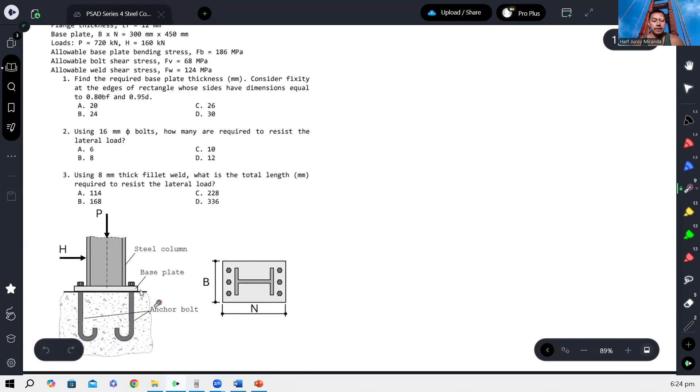You're given the properties of a steel column: the depth is 305, web thickness given, flange width given, and the flange thickness is also given. You have a base plate with given dimensions, and loads - a vertical load and a horizontal or lateral load. You're also given the allowable base plate bending stress, bolt shear stress, and allowable weld shear stress. Actually this item is under allowable stress design because of the given values.

But let's solve it anyway. Okay, so let's start with number 1: find the required base plate thickness, considering fixity - meaning fully restrained - at the edges of a rectangle whose sides have dimensions equal to 0.8 bf and 0.95 d. So what is the thickness of the base plate?

So what's given here, this is actually the conversion we use when we have a wide flange. That is, the converted rectangular or assumed rectangular equivalent section of this wide flange column. So what we do is...

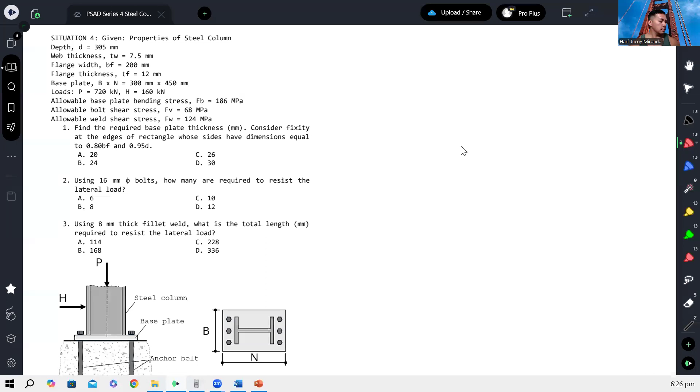Let's enlarge this. So that means let's assign values. This is 300, and then this is 450. So what it means by 0.8 BF and 0.95 d - if this is the BF...

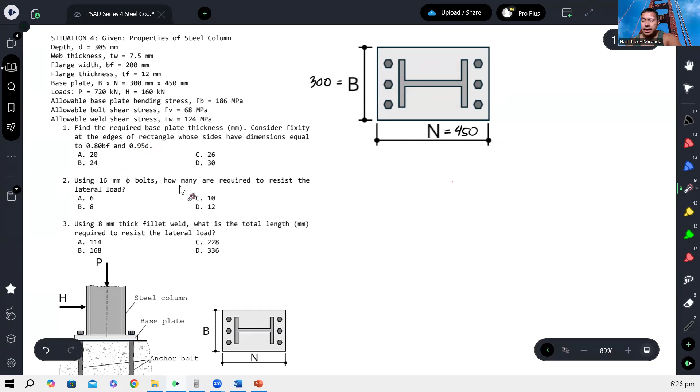We will consider only 80% of the flange width, so it's smaller. Then we will also consider only 0.95 of the depth, so it's also smaller. So the equivalent rectangular area will be something like this. If I trace it out, this is our equivalent area.

So let's convert it into a rectangular column, where according to the problem, this dimension is 0.8 of BF, while this is 0.95 of the depth.

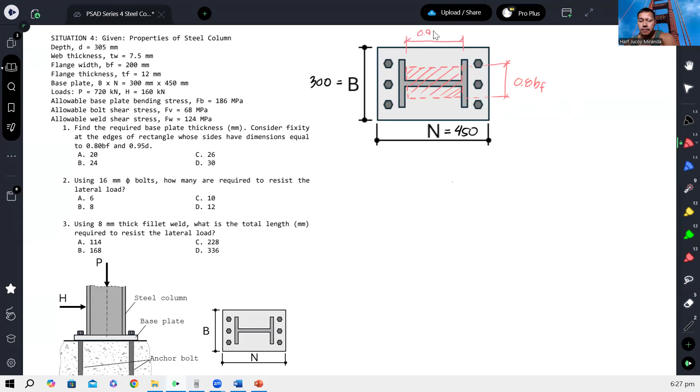Okay, so if we calculate that - 0.95 of the depth, and the depth is 305 - that gives us 289.75 millimeters. And for BF, we have 0.8 of BF, 200, so that's 160.

So let's convert it to the equivalent rectangular section. From here, what we visualize is that this sits on top of the pedestal, so it simplifies into a base plate that supports a rectangular column with dimension 289.75 millimeters by 160 millimeters. So it simplifies like this.

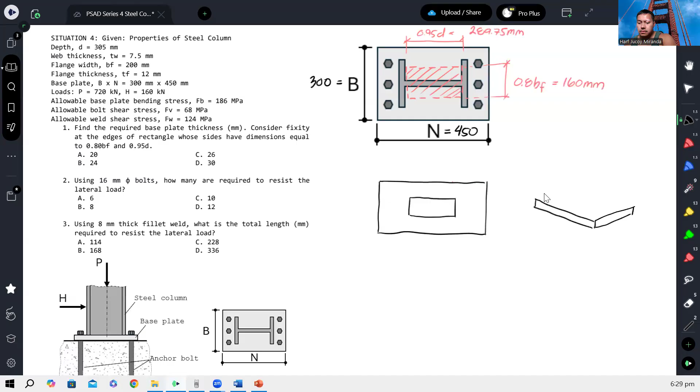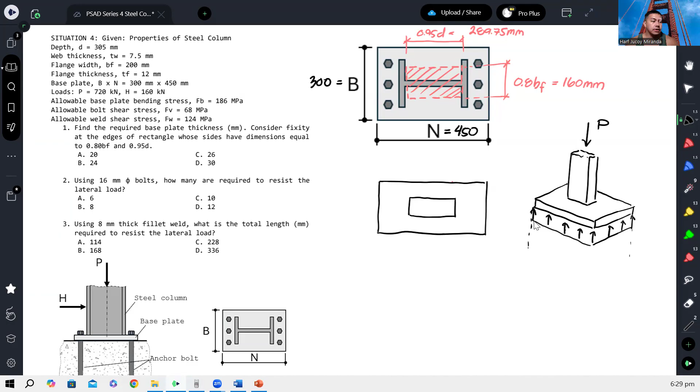So this is the rectangular column, and then we have the base plate, which of course sits on the pedestal - there's concrete underneath. Once we apply a force P here, the pedestal will react, so our reaction is upward, like this. Let's call that reaction FP or Q.

Or whatever we call it, that is a pressure - a reaction. So that pressure reaction is basically just the force divided by the cross-sectional area, which is the cross-sectional area of the base plate. Now you might ask, sir, what about the lateral load?

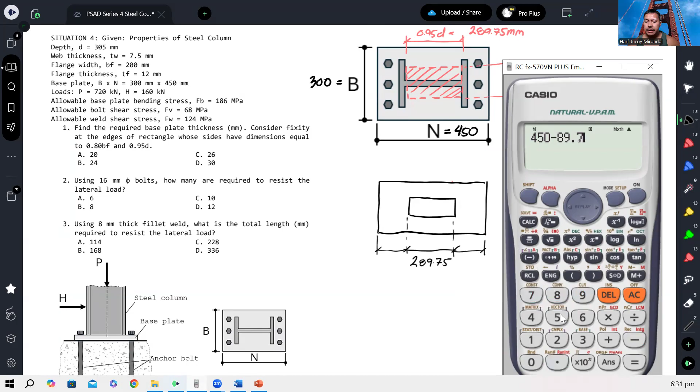Okay, tapos ito naman, okay, so this is 160. Dahil okay, and we can also measure this both sides. So again, dahil alam natin na ito ay 300, so 300 minus 160, that's 140 divided by 2, you will have here 70.

Okay, so those are the measurements. So ang idea ngayon sa pagde-design ng thickness ng base plate is kukuha ka ng unit width ng base plate, either in this direction, or in this direction, whichever will yield a larger bending moment or bending stress.

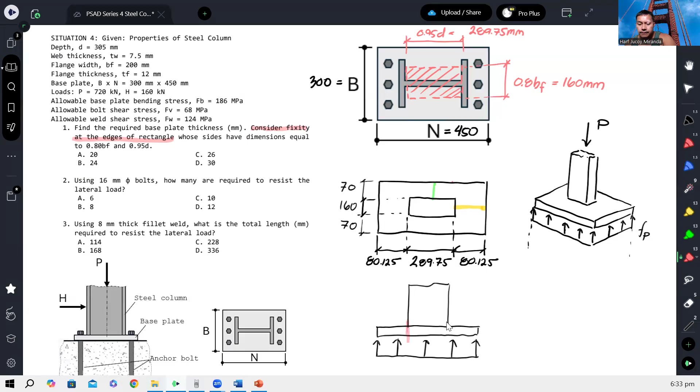Kasi ang idea niyan, kapag tumingin tayo sa side view, ito yung column. Kunwari lang nakatingin ako dito sa side view, sa side na to. Alam natin meron ditong pressure sa ilalim, yun yung FP. Kaya ang idea, ibig sabihin nitong statement na to, consider fixity at the edges of the rectangle. Ibig sabihin, i-assume natin na ito fixed support, ito rin fixed support. Ibig sabihin, itong part na to, dahil doon sa FP, uniform load, para siyang cantilever na kung saan ito magbe-bend upwards. I-exaggerate ko lang na mag-bend siya upwards.

Okay, ang gusto nating i-protect dito is yung pag-bend niya upwards. Ibig sabihin, gusto nating i-protect itong fixed part na to. Gusto nating malaman kung anong moment niyan. Kapag nakuha natin yung moment niya, that will be under bending stress at malalaman natin ngayon yung required thickness based dito sa binigay na allowable bending stress. So ganun lang yun.

Okay, so again, kukuha ako. Di ba natutunan naman natin na kapag mas mahaba yung length, mas malaki yung moment na ipoproduce nun. So actually, dapat i-check mo to, i-check mo to. Kaya lang, kung itong green, 70 lang yung length niya. Kasi itong dilaw naman, 80 ang length niya. So I think, between the two, mas critical itong dilaw dahil mas mahaba siya.

So dito, ang gagawin na lang natin, kukuha tayo ng unit width. Ibig ko sabihin ng unit width is, kuha tayo ng 1 mm na thickness or width. Tapos yun lang ang i-analyze natin. Okay, so kunin natin itong dilaw na to.

So mangyayari dyan sa dilaw na yan, assume natin na yung face ng column is a fixed support, and then gawin natin baliktad para magmukhang yung nasa side na yun, o yung sa kabilang side. Okay, so bali ito yun. And then, meron ditong upward na pressure FP.

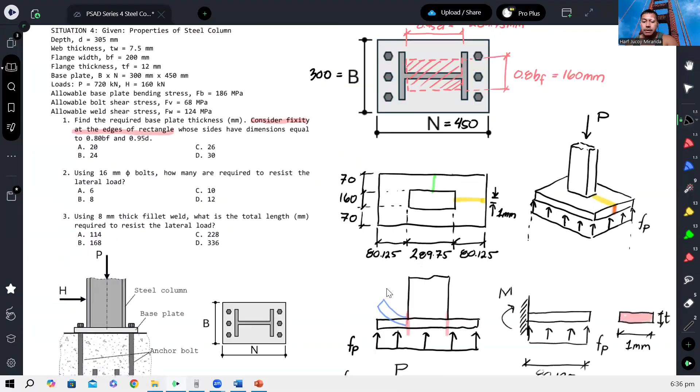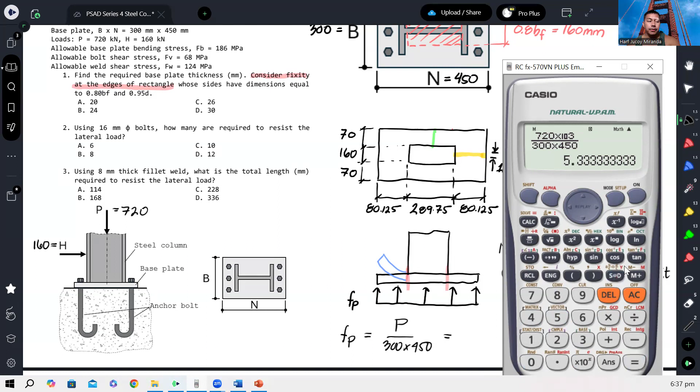Okay, so now, let's calculate first FP. Of course, to calculate FP, since yan naman ay based lang dito sa P na to, therefore FP will be equal to force P divided by yung area ng base plate, which is yung bearing area, bali 300 by 450. Saan na yung P? 720, lagyan natin, 720. Ito ay 160. So we have 720, gawin natin megapascal, gawin natin tong Newton. Tapos 300 by 450, so mm squared. So ito ay naka-megapascal, 5.33 megapascal, yung FP.

So 5.33 megapascal. Okay, so ngayon para ma-compute yung moment doon, summation ng moment at the face of the support, ito 'yon, equal 0. We have assuming counterclockwise positive. So yung in-assume ko na M ay clockwise, so negative M. And then yung moment na ipoproduce nito,

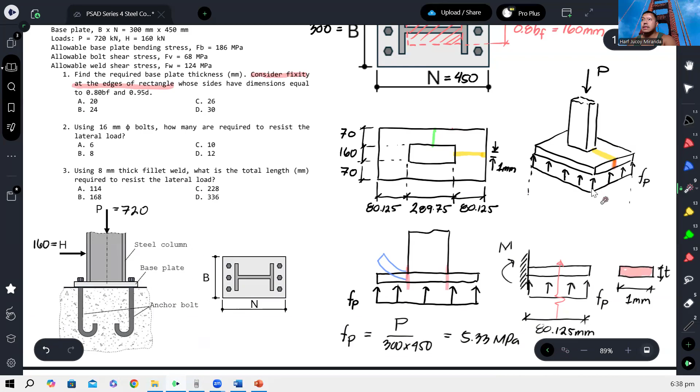would be the, bali actually volume yan, kasi ito yun eh. Bali ang area, meron din dito kasing naka-upward force. Bali yung total equivalent force nito would be the volume of the prism acting upwards doon sa ilalim ng base plate. And that would be yung length, or FP muna, FP times yung length, 80.125, times yung width, which is 1 mm. Okay, bali ito, force na to. Bali, length times yung width doon.

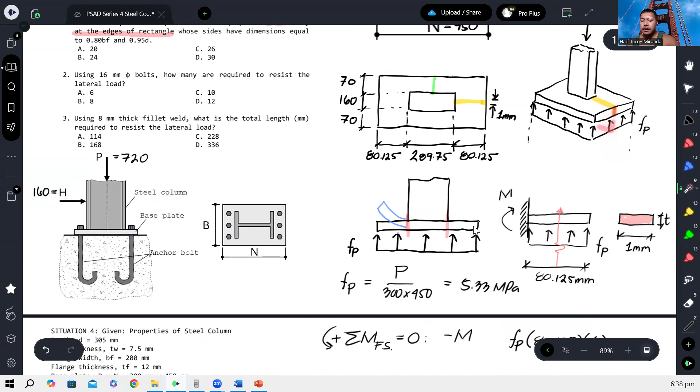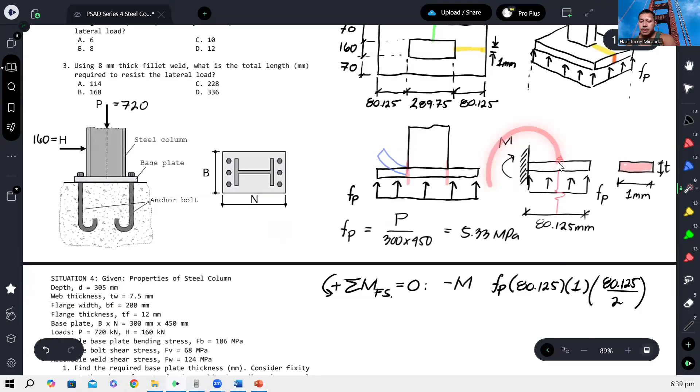So again, kung gagawin nating 3D yan, ito yan eh, kumbaga ito yan. Okay, so meron dito sa ilalim na nag-a-act sa kanya. And then, ito, half. Yung moment arm will be half of 80.125, so 80.125 over 2. And this will be plus. Sunan natin konti. The rotation it will produce will be counterclockwise, so that's why this is plus. And then this is all equal to 0.

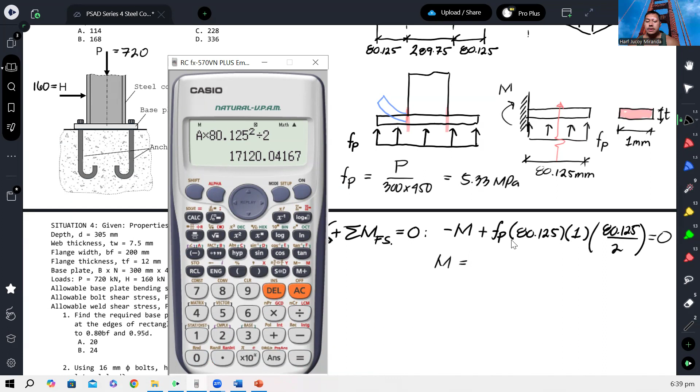Okay, and then kapag pinasok natin to dito, yung 5.33, we will be able to calculate the moment, the critical moment at the face of the support. So ito yung FP, multiply lang, store ko na siguro to, baka kailangan natin mamaya. So FP times 80.125 times 80.125 over 2, and that gives us that moment. That moment is in Newton millimeter, kasi megapascal ito, tapos ito puro millimeters. So we have 17120.04 Newton millimeters.

Okay, so ngayon na meron na tayong moment, papasok na natin ngayon yung bending stress. Di ba ang bending stress ay equal sa MC over I.

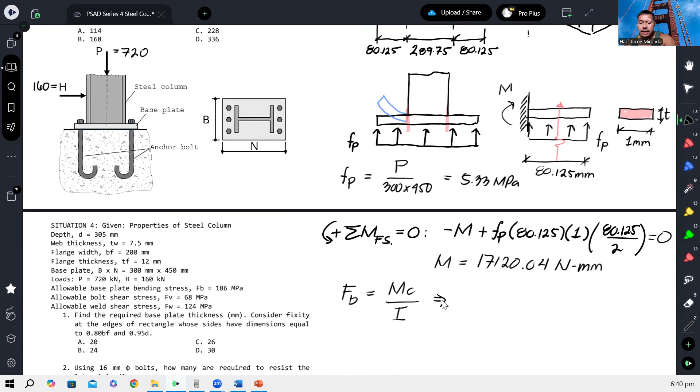Okay, we know that the allowable bending stress is 186 megapascals. And this is our M. Now, this is our C, this is our cross-section. When it bends about this axis, our C is half of T.

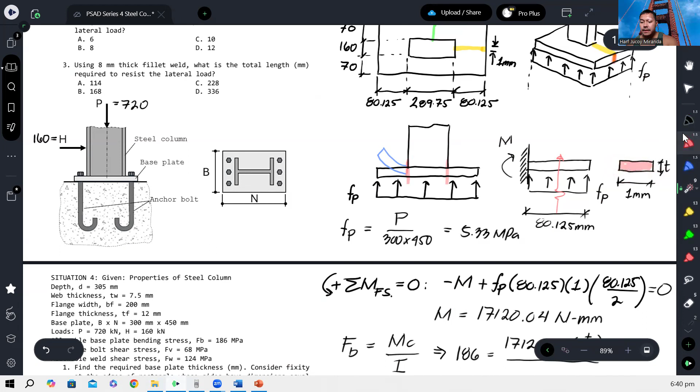So what is our I? This is our axis of bending. This is B, and this is H. So, BH cubed over 12. So 1 times T cubed over 12.

From this equation, we should be able to calculate the required thickness. Let's compute. Let's see, these cancel out, then we square it, cross-multiply, divide, and get the square root. You can use your calculator, but I'm used to doing it this way.

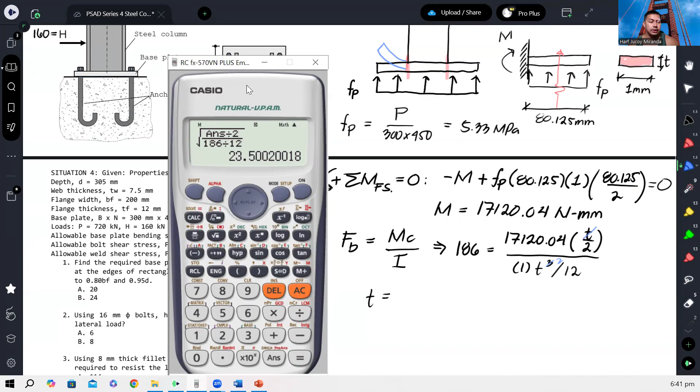So we have the answer from earlier, over 2, over 186, over 12. And that gives us 23.5 millimeters. So this is our required thickness.

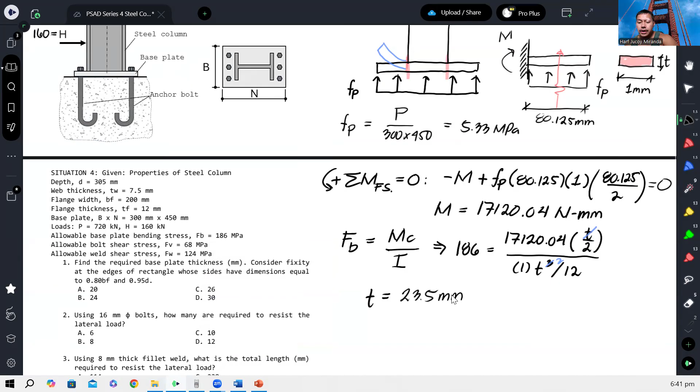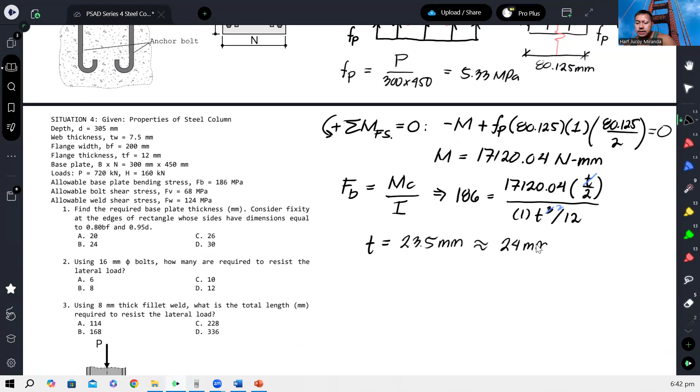So in the choices, we have 20, 24... Since this is the size of the material, we need to round it up. So we can use 24 millimeters. That would be our answer for this item.

Next: using 16 millimeter diameter bolts, how many are required to resist the lateral load? When this acts horizontally, the bolts here will experience shear stress. So these are simple stresses. This is number 2, and this was number 1.

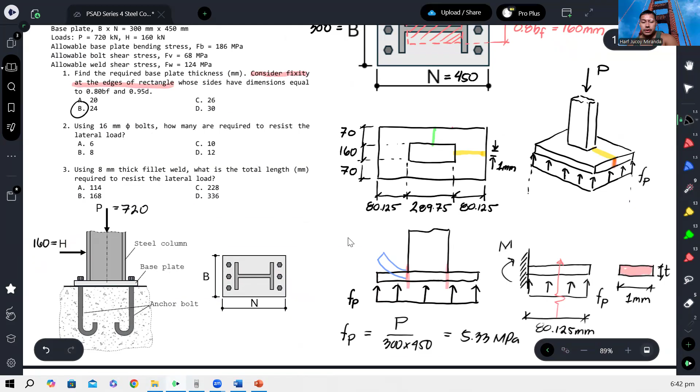So for number 2: allowable shear stress equals force. In this case, our force is H, over area — the area of the bolts. But if it's just one bolt, the area of the bolts is the area of one bolt times however many there are.

So let's just call it N, however many bolts there are. So therefore we have FV, 68 megapascals, equals H, which is given as 160. Let's convert to Newtons to match units with megapascals. Then N times the area of one bolt.

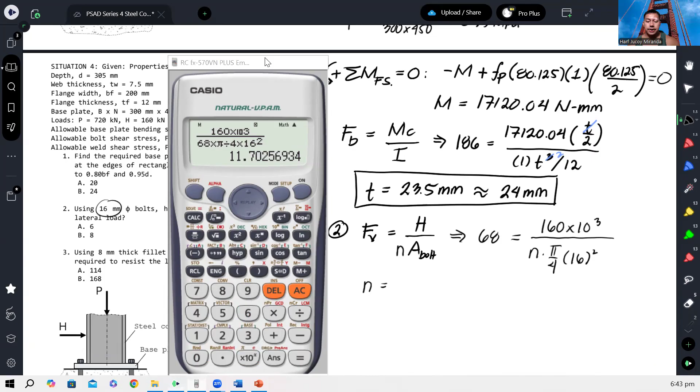So pi over 4, and the given diameter is 16 millimeters. From here we should be able to calculate N. So we have 160,000 over 68 times pi over 4 times 16 squared, and that gives us 11.7. Again, we round that up to 12 bolts.

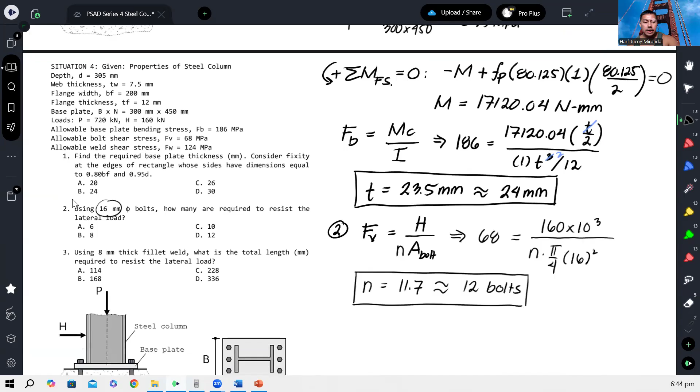So our answer here would be 12 bolts. Finally, number 3: calculate, using an 8 millimeter thick fillet weld, what is the total length required to resist the lateral load?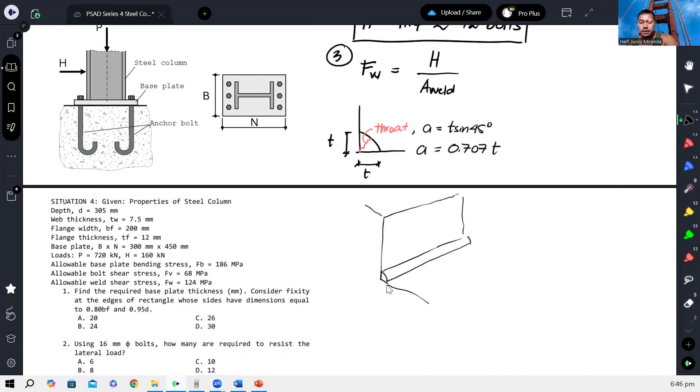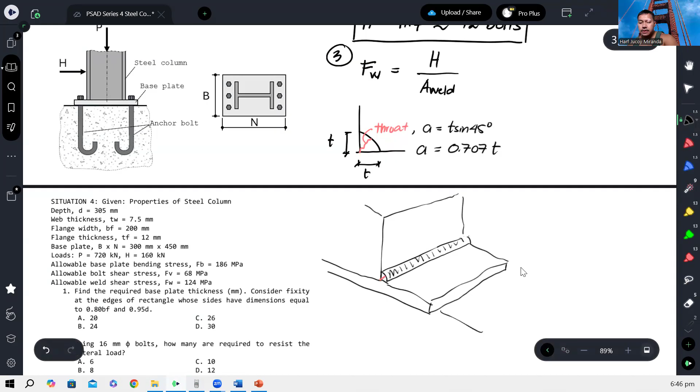So of course the total length — the length of the throat is just this. Plus, this is the length of it, times however long that weld is — the length of the weld. So here it's the same. Therefore, this equals H over the area of the weld, which is 0.707 T times L.

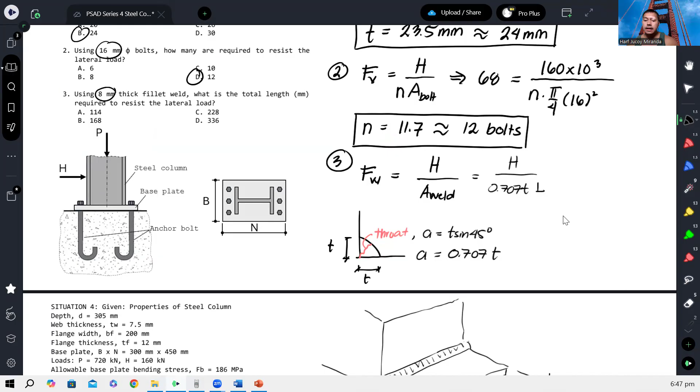From there, continuing below: the allowable weld shear stress is 124 megapascals, equals 160 kilonewtons over 0.707 times the thickness of 8, times L.

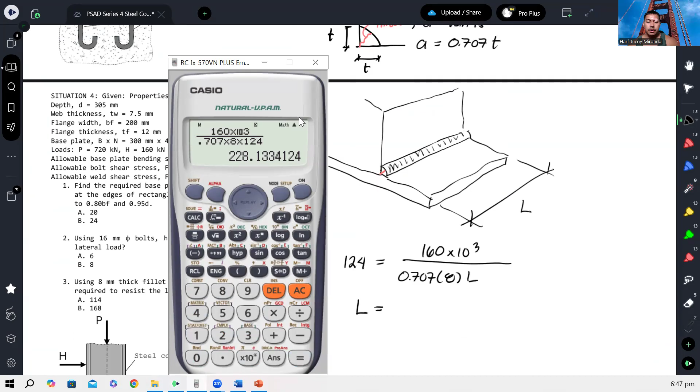From here we can solve for L: that is 160,000 over 0.707 times 8 times 124. And that gives us around 228.13 millimeters. So for this one, our answer would be 228.